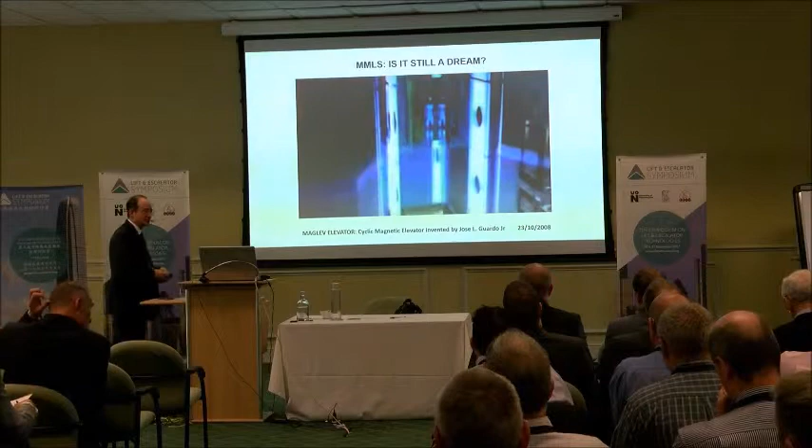Yes, if you look on the internet, if you look over the history, there's all sorts of videos and things of multi-mobile lift systems that have been dreamt up and literally dreamt about for years and years and years. And perhaps, finally, we're beginning to see the possibility of these systems coming to fruition.

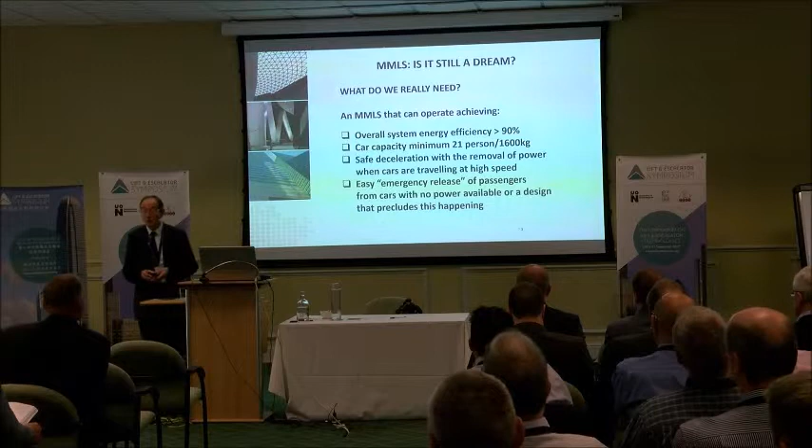I put on that slide there what I think, personally, we have to achieve in simplistic terms with any multi-mobile lift system. And that concerns the basic safety of such systems and the capacities and efficiencies with which we would have to get them to operate in order that they can be, as it were, applied to buildings, sustainable buildings, green buildings today. So quite a challenge.

To give you some idea, this is an area that, as a firm, perhaps you might say as a family, we've been looking at for 40 years. I mean, if you go back to 1980, we sponsored a PhD student, Haider Al-Abadi, to look at application of linear motors to lifts. And in those days, you had water-cooled transistors that blew up every hour or so, and you didn't have much chance of building anything, quite frankly.

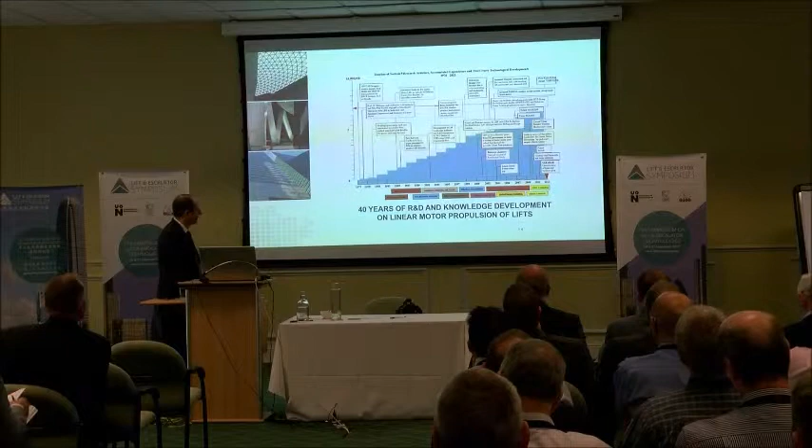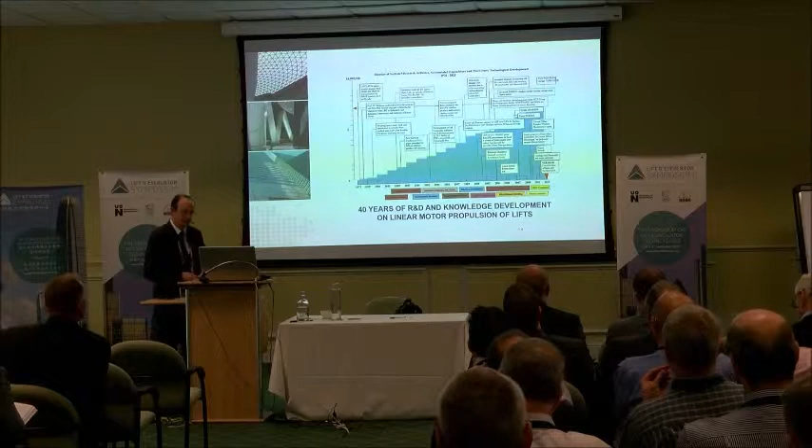But the technology, of course, has moved on enormously, and we're now seeing the potential, at least, for motor designs and so on that could potentially give us the efficiency and the force density we need to make these systems viable. So it's been a very long progression. A lot of work has been done, a lot of things tested in the laboratory, so on and so forth.

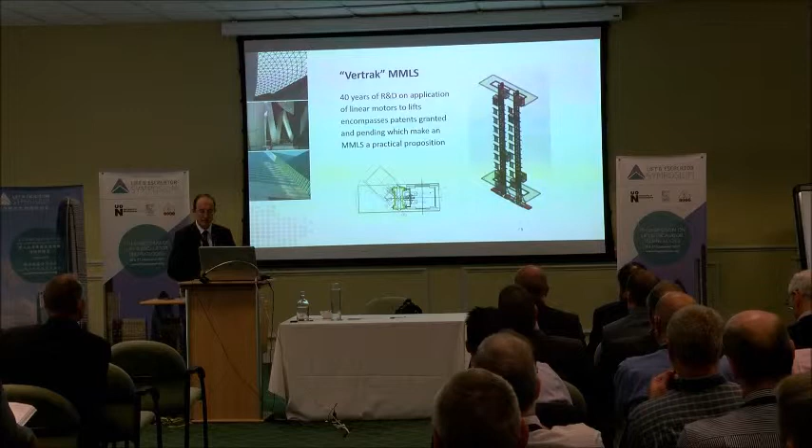We in the background have been sort of second-guessing how such a system might go together, and for the purposes of a sort of buzzword, we've called it Vertrak, because that's the name we've given to a multi-mobile lift system that we think would be the sort of thing that might rise to the challenge ultimately. And as I say, this has been a long period of time. We've been looking at this and trying to understand and meet the different challenges involved in designing such systems.

Of course, inherently, if we ultimately succeed with this, those are some of the many benefits that would accrue. And one of the key things we believe is that these systems need to be modularized, factory produced, precision built, and capable of being delivered on site and installed very quickly and efficiently. We're going to be talking about a 250-floor building, and one of the keys to this is going to be high-speed installation if we're going to have a chance of meeting the construction schedule. So those are some of the many benefits that would accrue.

We've come up with our own way of switching cars between shafts, a simple pivot mechanism where the car always stays on the track. We've looked at how this would be applied, how it could be realized mechanically, so on and so forth. How would these systems be applied into buildings?

Well, I'm going to talk briefly about what the implications are of these systems, which have much higher density of passenger handling than we're used to with conventional lift systems, and this brings its own challenges in terms of the building design.

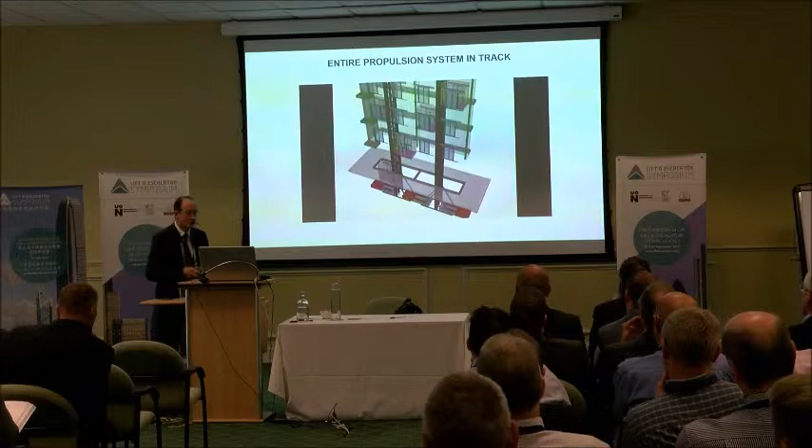Some of the things we're starting to understand is how can we simulate these systems? Because obviously, I believe ultimately, we need to be able to provide the same kind of assurances with our classical simulation models that we do today with conventional lifts for multi-mobile lift systems, so that we can sort of hand on heart say, yes, we've got the handling capacity, we've got the quality of service there. Fundamentally, we see no reason why this shouldn't deliver what's required for the building.

Well, late last year, I was approached by a firm of architects to look at whether a 1 kilometer tall building would be feasible, and on what basis. And of course, I couldn't think of a better opportunity to bring all this thinking together and start to understand what it might mean to apply these systems into buildings. And that is where we started this work.

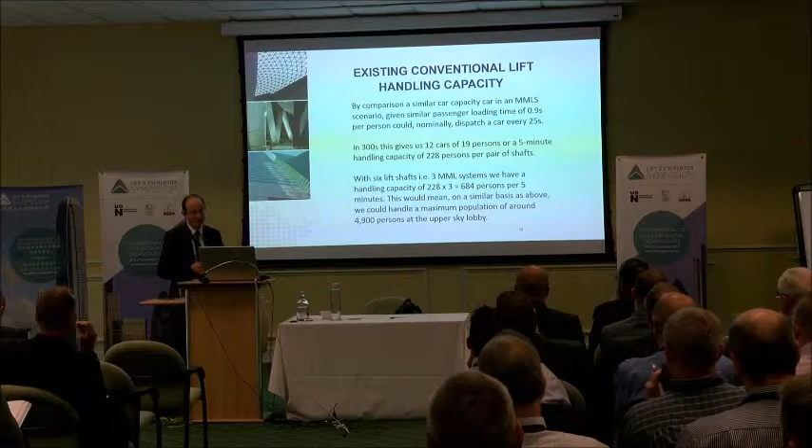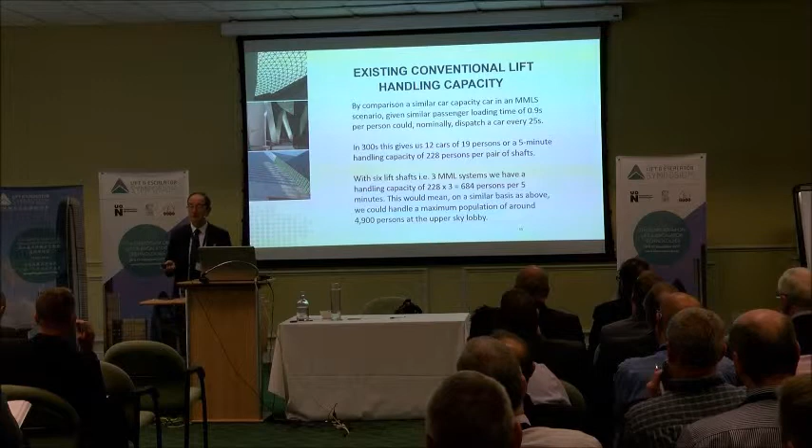And then we looked at, well, what could a multi-mobile lift system do for us if it were available? We might be able to dispatch a car every 25, 30 seconds in the same shaft, taking account of passenger loading time and door times, everything else, cars clearing the loading floor. And we found that with 6 lift shafts and 3 multi-mobile lift systems, we could probably handle about 80% more people to a destination, again, 600 meters above ground. So it starts to indicate the huge handling capacity advantage of these systems.

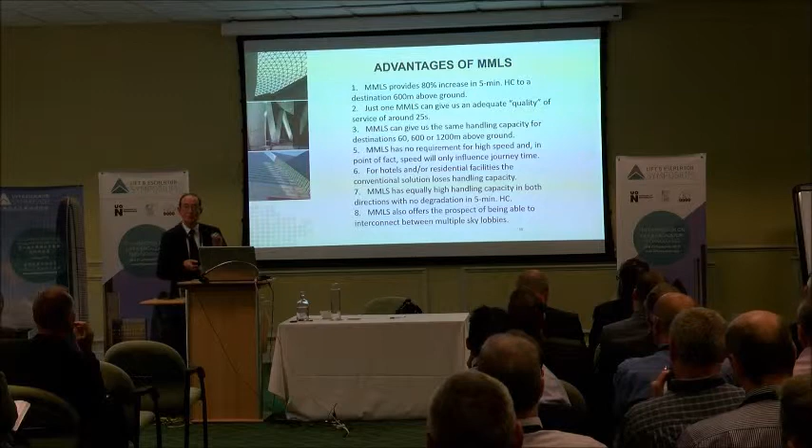And just one multi-mobile lift system, of course, gives us a quality of service that already ticks the box in terms of typical office average interval and so on and so forth. Of course, it doesn't really matter where those people are headed to. It could be 60, 600, or 1,200 meters above ground. Inherently, that doesn't make any difference now, because there's no limit on travel, and all we're really talking about is what's the journey time.

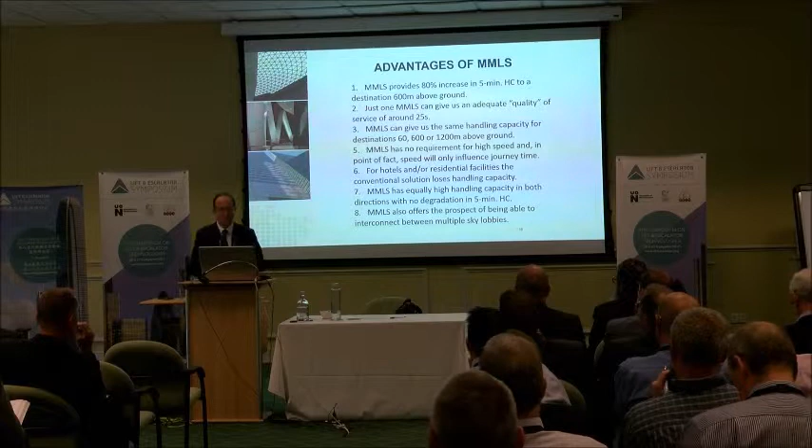Of course, if you have two-way traffic at peak, you're going to lose some handling capacity. But the advantage of MMLS is if you have got down traffic, you can handle it without any degradation of your up-peak handling capacity. So it's got enormous, as it were, balanced up and down inherent handling capacity if you need that. And there's a prospect of starting to link sky lobbies together, for journeys that move people around the building from sky lobby to sky lobby. I'll talk a little bit more about that in a moment.

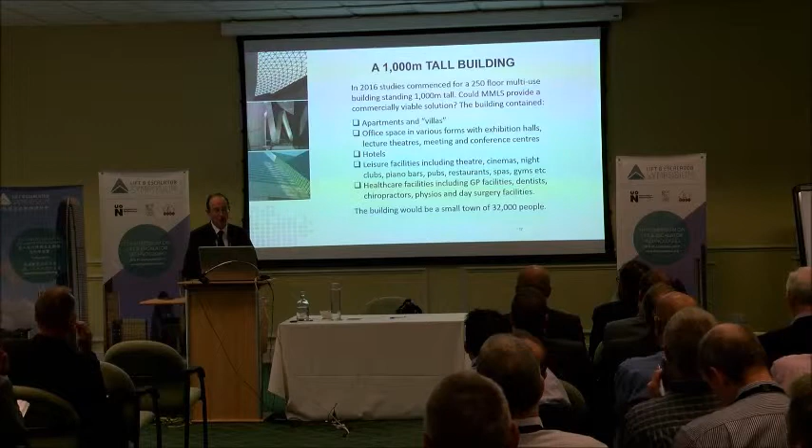So what are we looking at? Well, we're looking at a 1 kilometre tall building that might house up to 32,000 people. So it's kind of a small town that contains almost everything. A live, work, play environment where everything is sort of on your doorstep or no more than perhaps 3 lift journeys away.

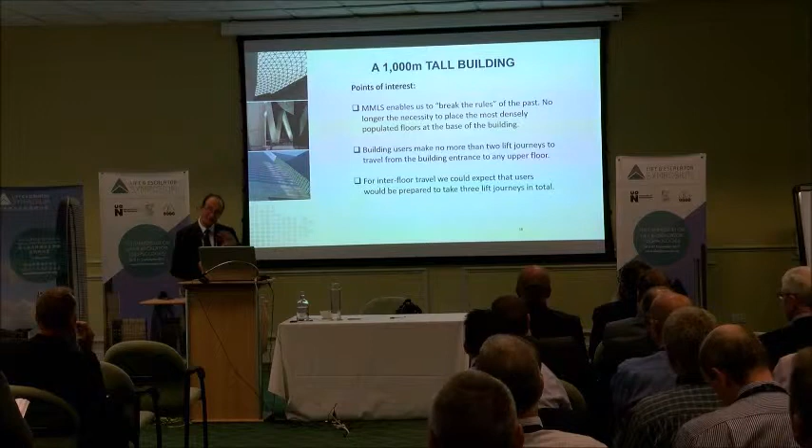So what does this bring about? Well, it tends to break some of the rules that we always had of, well, we must put the higher density facilities like office, the higher densities of occupation at the base of the building. That doesn't necessarily have the influence that it did before, because as I say, it doesn't matter whether the sky lobby is 100 or 1,000 meters above ground.

We expect still that people would not make more than 2 lift journeys when they enter the building to get to their ultimate destination. That seems reasonable, but it also seems reasonable that to get from any destination to any other destination in the building, 3 lift journeys might not be unreasonable.

Now, if we stack our 250 floor building into 5 sectors of 50 floors, even when it's offices, we can deal with that without any sky lobby or changes taking place with conventional lifts. So what I'm talking about here is a solution that encompasses conventional lifts locally and multi-mobile lift system to deliver people to the sky lobbies. I think this is probably a very good starting point for application of multi-mobile lift systems, because it's far simpler to control and deal with.

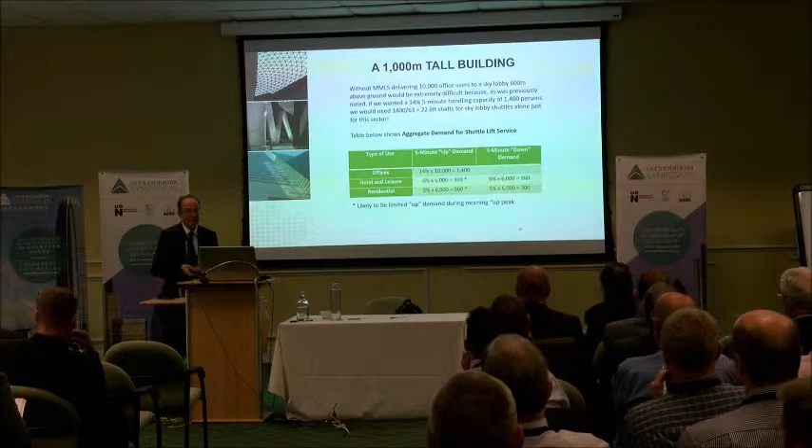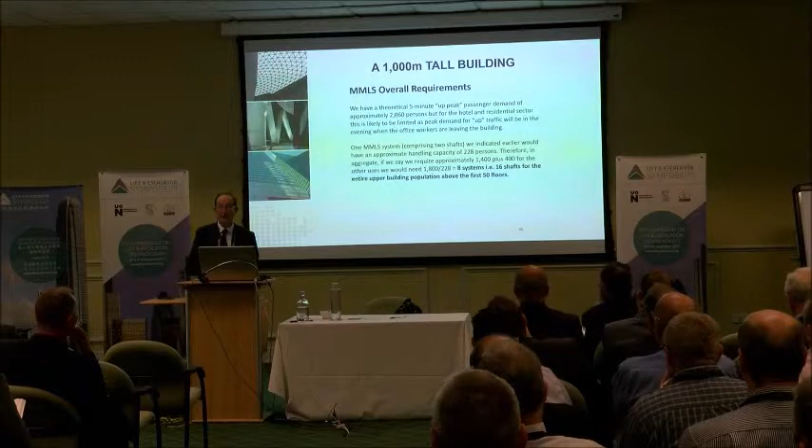Here you've got what might be the aggregate up-peak demand that you might see at the main lobby, and, as it were, what down demand there might be for people leaving the building during this peak period. And what did we find? Well, we found that in fact, instead of it perhaps requiring a huge number, if you take the upper office sector alone, you might need 20 plus shuttle lifts. We're dealing with 8 systems, 16 lift shafts to deal with all the population movements above the first 50 floors, in other words, to distribute people to the upper sky lobbies.

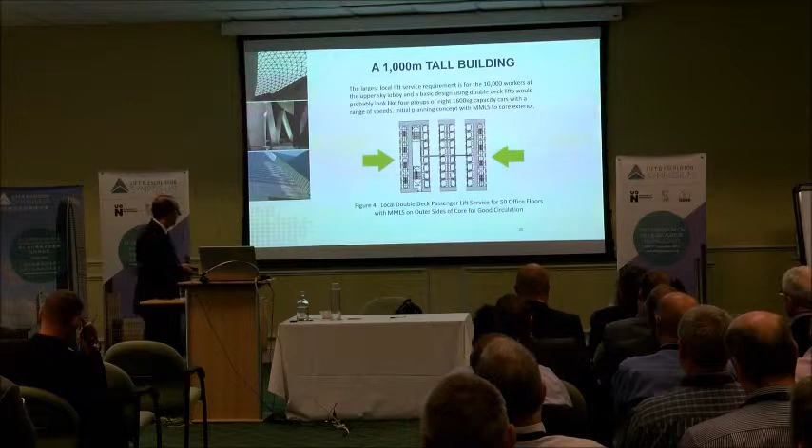Well, when you start to look at the throughput and the circulation requirements, our typical lift lobby may allow us to get the flow of people through the width of lobby, but in real terms, dealing with the queuing numbers and the physical space required, our typical lift lobbies will not work in that sense. So we came up with the idea of placing the multi-mobile lift systems on the outer edges of the core. After all, these will only be accessed at the sky lobbies, and then the conventional lifts are placed between those 2 systems, and that, in terms of circulation space just at the sky lobbies, gives us much better opportunity to deal with those large flows.

Well, when you're dealing with these large flows, another consideration is simply the exit and the entry of people and how you might deal with that. One of the things we've been looking at is having an exiting floor different from an entrance floor to avoid cross-circulation. And this does not have a penalty on these types of systems, because obviously cars that are travelling down can easily stop at a different floor for people leaving the system, as opposed to those people coming into the building and travelling up.

Another thing that's very useful is the ability to service these different sectors on different floors, again, to spread out the circulation and to provide perhaps electronic signage and direction that could be varied according to demand and could direct people to different lobbies depending on the traffic flows and demand at any point in time.

Another thing is that lift systems today generally are allocated to specific tasks in buildings. In other words, if you go to a Shard building or whatever, a multi-use type tower, you go to the correct group of shuttle lifts that will take you to your office sky lobby or your hotel sky lobby.

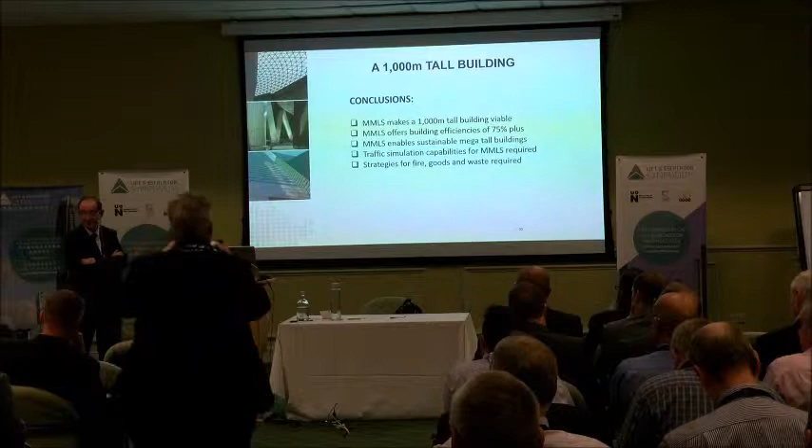Even if you started tomorrow, we're probably looking at another 2 or 3 years before anybody's got a true MMLS carrying passengers. But I think we're at, as it were, the dawn of MMLS, and I think that's what's exciting, is that we will see this technology arrive in the next few years, one way or another.